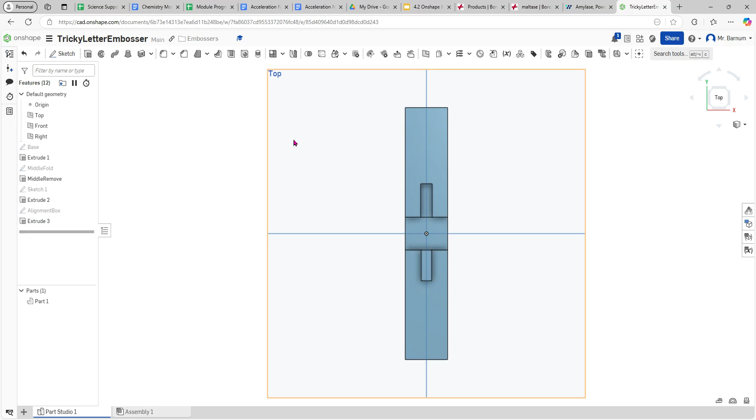Okay, so let's say we want to make a little bit trickier letter. We'll still use the same process, starting from this point. We're going to make a sketch, pick our letter tool, make it roughly the size we want, and this time I'm going to pick a letter B, and what makes it trickier is that it has closed shapes to it. I still want it bold. I'll pick the same font. No, I'll pick a new one just for fun.

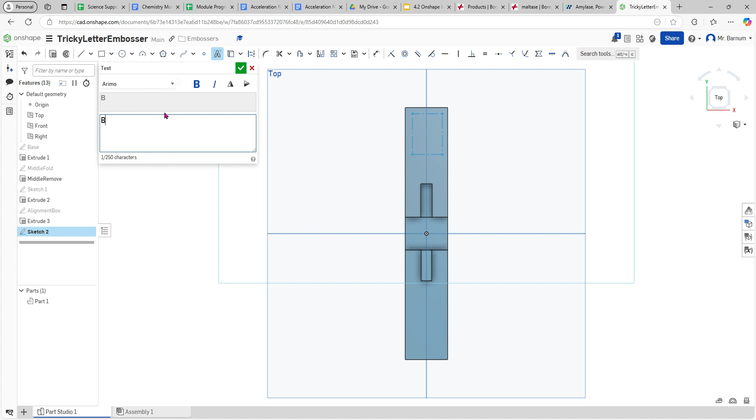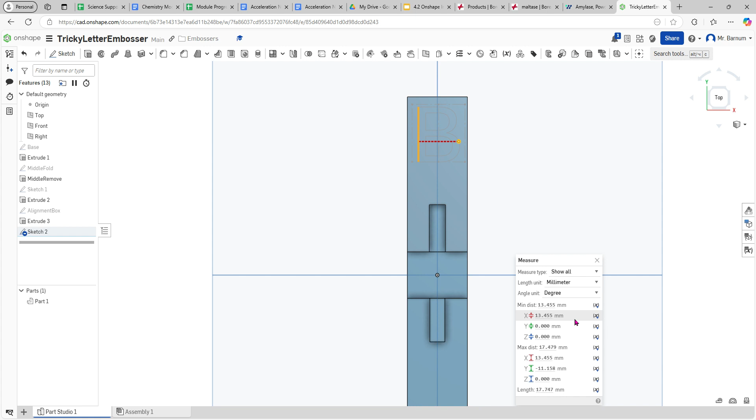So here we have letter B, and then we can drag it by the dotted lines only. That's looking about the right size. This is one where we don't have to follow exactly from the documentation, but we'll go here. We can measure just if we want. We'll click from one side to the other. From one side to the other should be 13, and very close to 13.5 millimeters, which is about what we want. So hit the spacebar to unselect it.

We'll do an extrusion of that letter, 0.6 millimeters. Ta-da! That looks pretty good. And hopefully this is becoming familiar by now. We're going to make sure that that's a new item, not a copy, or not embedded into the other one.

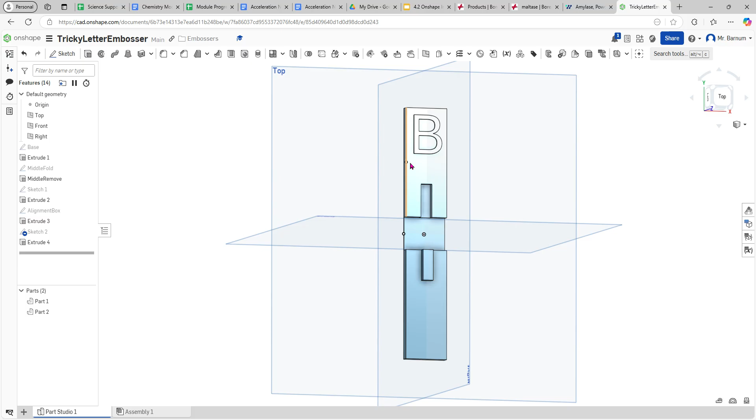We use the mirror tool. Pick that new part we just made. Mirror plane, there's that. And we want that to be new also. So now we have 3 separate parts.

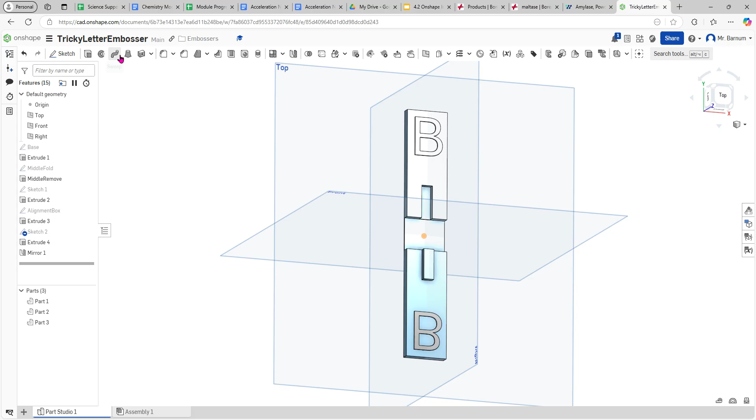This is where it gets a bit tricky. We're going to go and make a new sketch, still on this side like before. And we're going to start by doing our offset just like before, 0.25. You might say, Mr. Barnum, this is all looking exactly the same. What are you talking about? It's like, well, you'll see shortly.

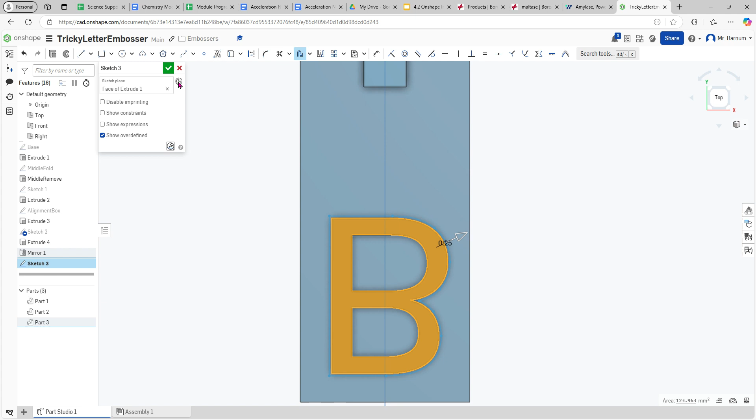This is an offset going outwards, so we can finish that one. And if we were to end right now, we would have an outwards offset, but we're still missing the inside.

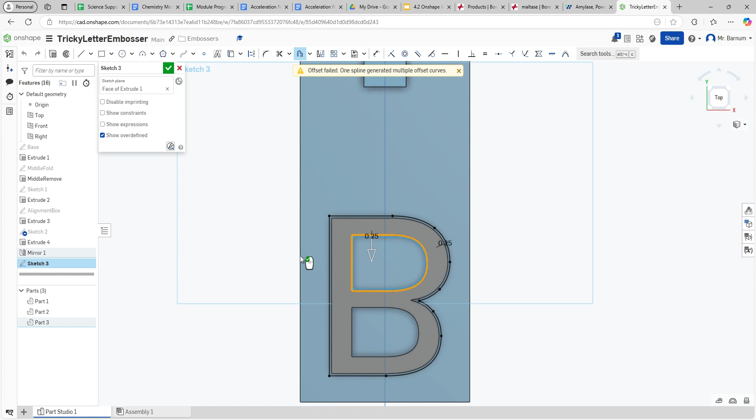So we're going to go back into that sketch, and now we're going to select the inside parts, like so. And we're going to do an offset internally. You click on this, 0.25.

Check, and here, same thing. We're going to go here, here. You may be able to do both halves at the same time. Sometimes it gives an error, but it's good practice to do it separately anyway. So we're going to double click on this, 0.25. Check, and we can see it's actually going in, not out. Yes, we're good. We'll hit OK.

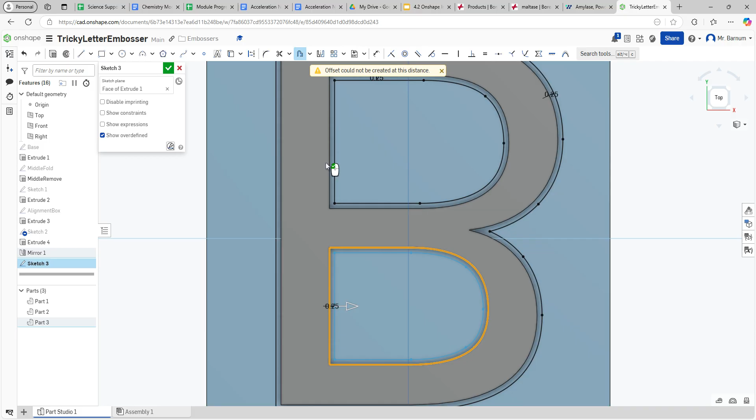That looks good, and now we're ready to complete. We'll name this one here. This is the offset sketch.

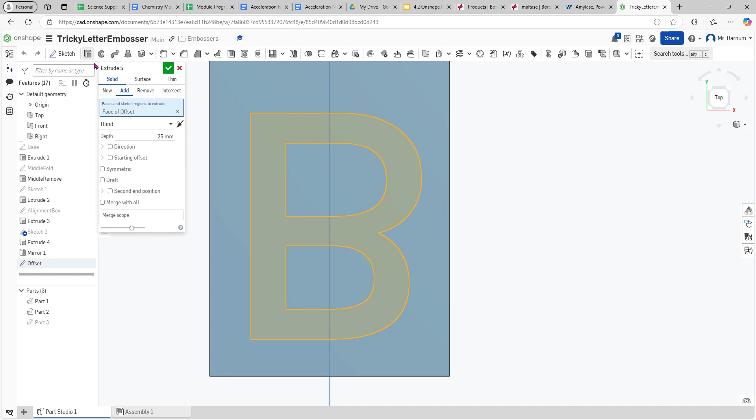Now we can get rid of that third part. Now we can take this part. We'll do an extrusion, a removal, merge with. We can do merge with part 1. Actually, that's exactly what we want. And here the depth is 0.6 millimeters.

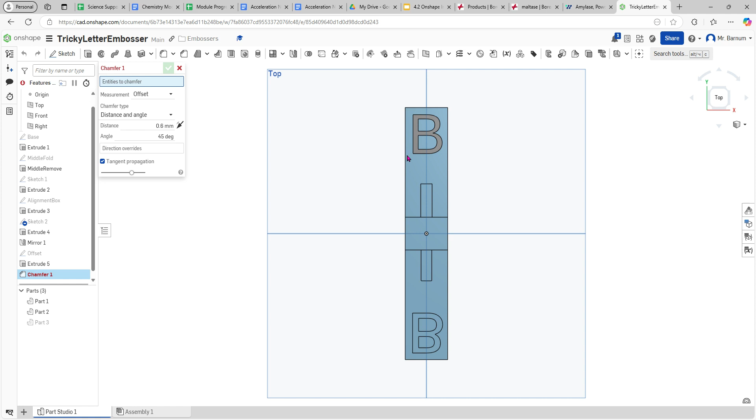So now we've got a little b, we've got a big B. Only thing left to do is our chamfer. And if we're lucky, we can select all of that one at once, all of that one at once. It's looking pretty good. And let's make sure the big B is there. Big part of it, little part of it, all lines up. Good to go.